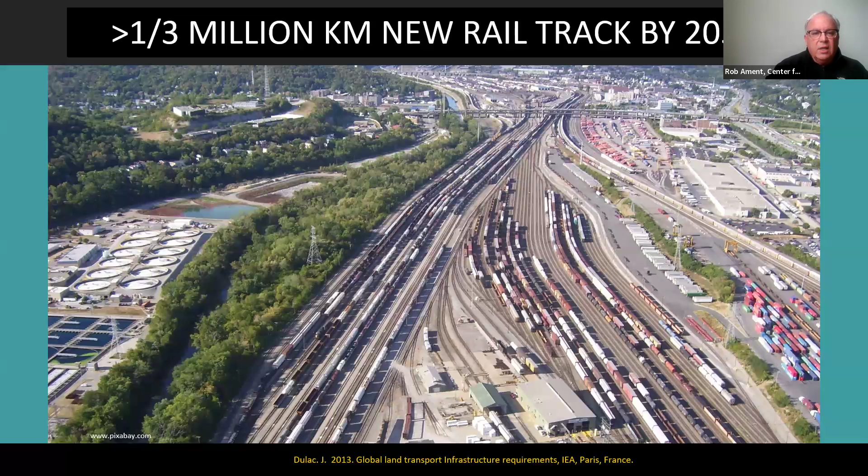And I will cover a little bit on rails as well as roads, and they too are being expanded greatly. And of course, the benefits are for economic development, and countries do want to invest in their infrastructure. So what we're trying to do is balance those needs for socioeconomic development with the protection of biodiversity and ecological connectivity. And this is where I always share with people around the world the case for wildlife crossings.

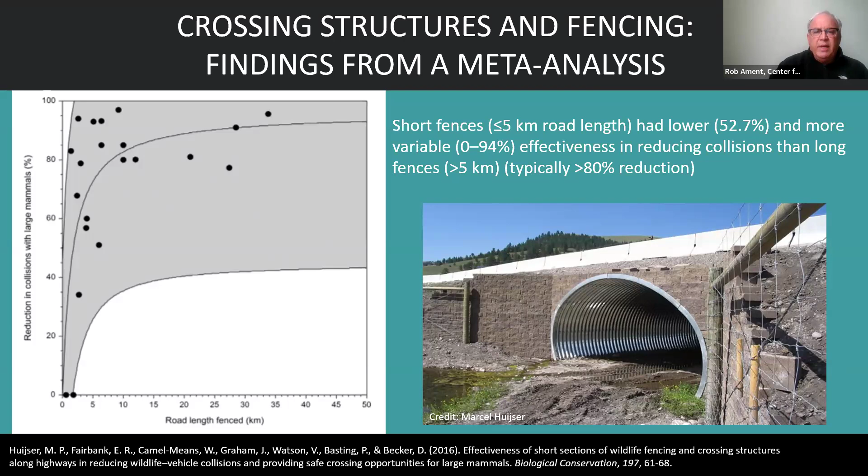And so this is now being established across the world. The very first group to focus on ecological connectivity at the IUCN was established just in 2016. And the president of my organization, the Center for Large Landscape Conservation, Gary Tabor, is the chair. And so as a result of being the chair of the IUCN's connectivity group, we provide its secretariat. Basically, we staff it for 1,200 members, all volunteers on all the continents.

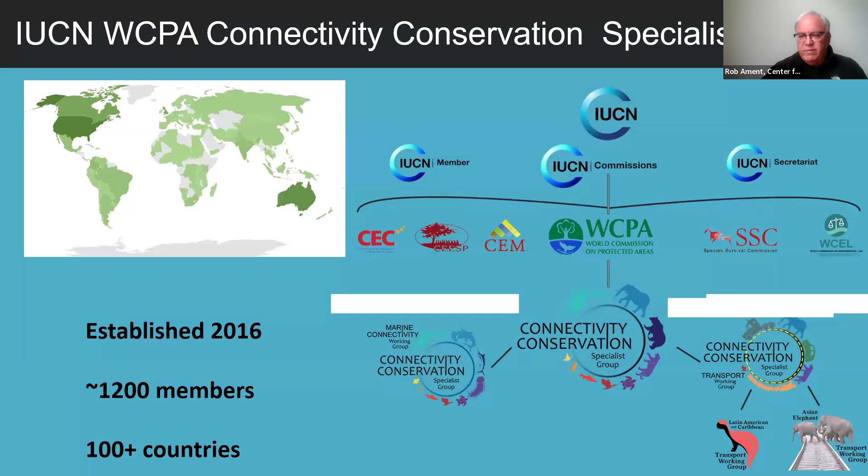And there are many different specialist groups, but you can see we sort of sit under the World Commission on Protected Areas. So we don't have a broad term of reference, but our working group for transportation is focused on ecological connectivity and to help managers of protected and conserved areas address linear infrastructure.

So then just 1 year later, the CCSG, the Connectivity Conservation Specialist Group, formed the Transport Working Group. They said one of the biggest barriers to connectivity is transportation. We need some expertise on that. And so that was formed. I'm a co-chair along with Rod van der Ree out of Australia. We have 100 members, and we were to provide advice on policy science. You can see the terms of reference to the CCSG.

And so the Transport Working Group published our first, it took us 4 years. We had over 40 contributors to this publication. And of course, IUCN published it, and it just came out last July. And we did our first webinar 2 days ago. So this is very timely, and we're starting to promote the results of the technical report. And we're quite pleased with the response we're getting across the world.

And so we know that providing advice just globally often is not very context sensitive. So we are experimenting with 2 subgroups in our Transport Working Group. One is species specific, and that's the Asian Elephant Transport Working Group. And one is sort of sub-regional, the Latin America, Caribbean Transport Working Group. They conduct their meetings primarily in Spanish and Portuguese. So we have these 2 groups, and they're continuing the work of the larger group.

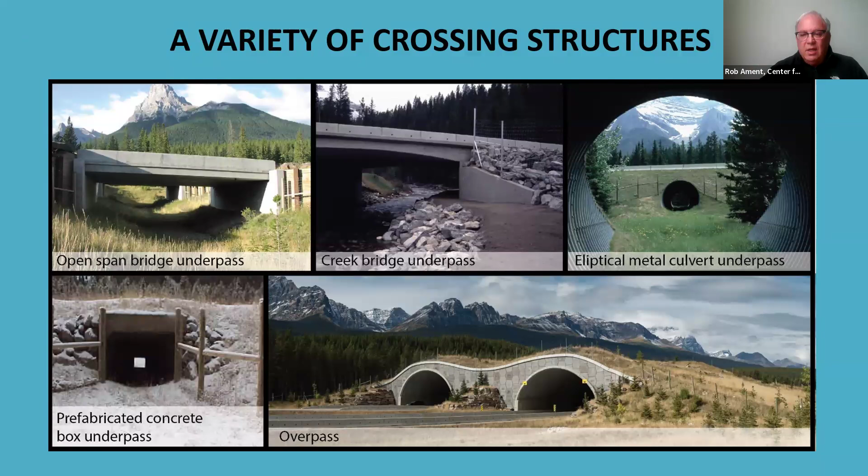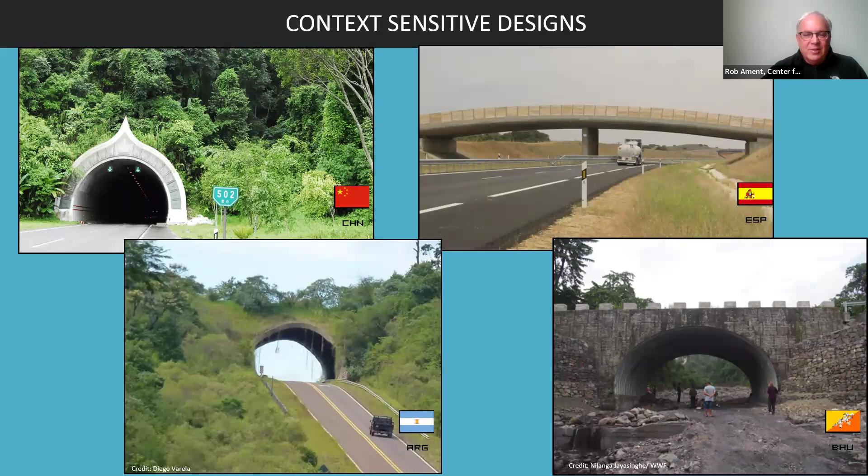And 2 years later, I was invited to Guadalajara. 300 civil engineers get together and are finally starting to talk about this. They're getting really excited about starting to design their highway systems so they're more sustainable and providing ecological connectivity.

I met a fellow who was a consultant at this conference. There was no field trip. And then he takes me out on the road outside Guadalajara. And he says, yeah, I'm the consultant studying the wildlife crossings. I said, oh, we didn't even have a field trip planned for this conference. And so he said, well, I'll take you.

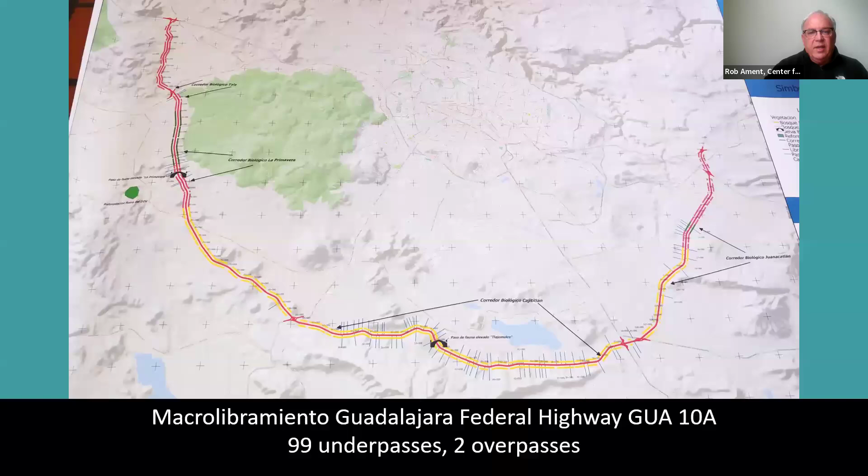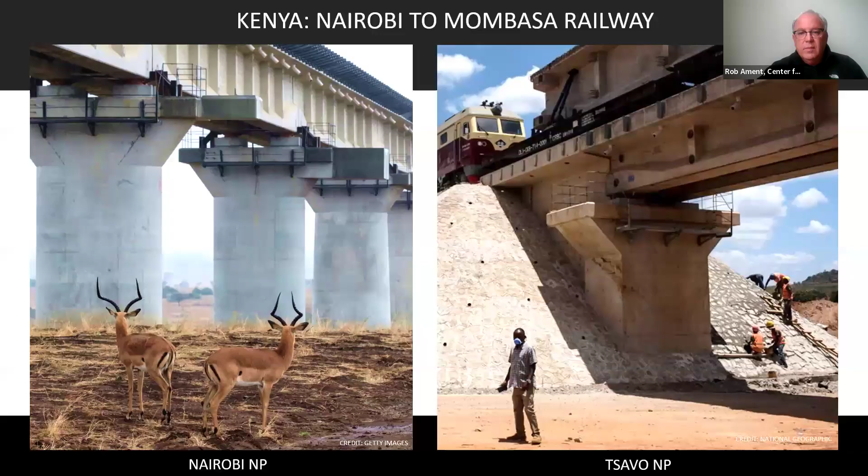So this railroad went through two different protected areas, not only Nairobi, where they lifted it on the left, but National Park, but also Tsavo.

But in Tsavo, they just created underpasses and put in monitoring, and they actually published a paper on this. What they found is even these are quite high - 30% of the elephants won't use the structures because they're narrower than the totally elevated rail. So even though they built about 6 structures like this, they've seen very little use by a major chunk of the local population. So even when mitigation is put in, sometimes it doesn't work as effectively as possible.

We're now recommending - the Asian Elephant Transport Working Group is recommending - 6 meters as a minimum for underpass structures. But at least they were able to mitigate the rail through the protected area.

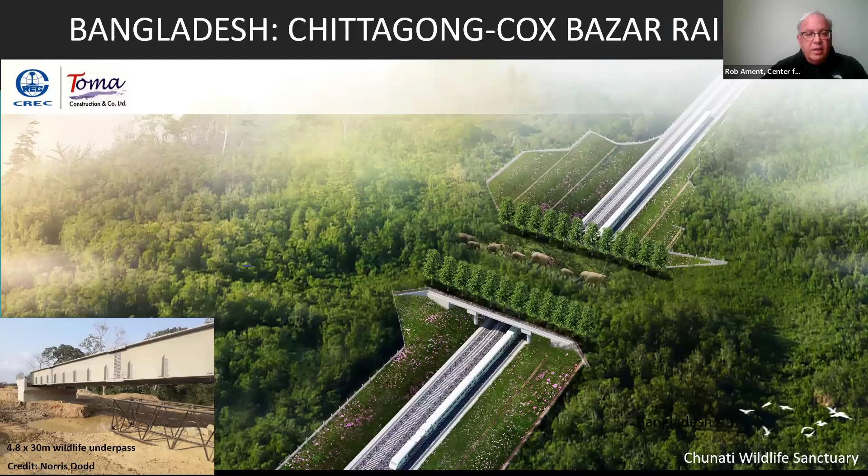And this is the first Asian elephant overpass in the world, and it's Bangladesh building it. So again, these are not wealthy countries. They're taking out loans to build this infrastructure, but they're still trying to protect their biodiversity and their ecological connectivity.

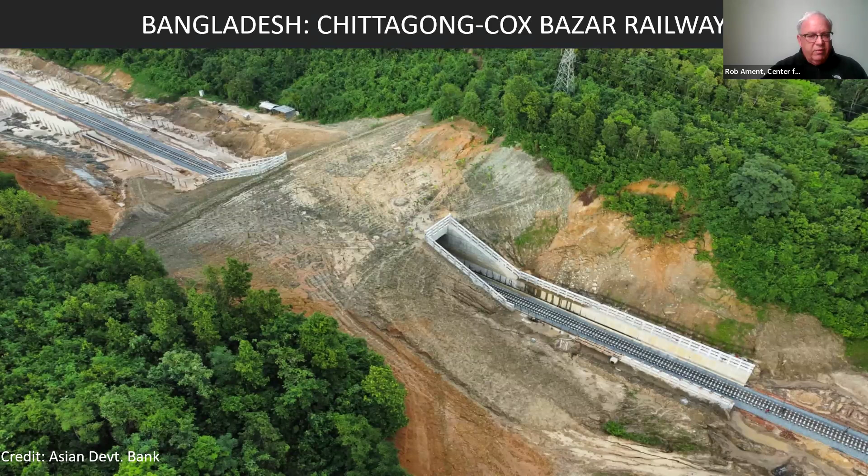And there had been a very well-conducted pre-construction analysis of wildlife before the rail was built, and they knew where the elephant corridors were. So these are well-placed structures as well.

So to get to zero mortality, what they did is slow all trains down. I don't know of any railroad where we're managing speeds to protect wildlife in North America, but they make it go down to 20 kilometers per hour through this area that they know the elephants frequent. Just by traffic calming, as they call the mitigation measure, they've stopped all the mortality. So a simple thing rather than a structure - they went with management of train speed.

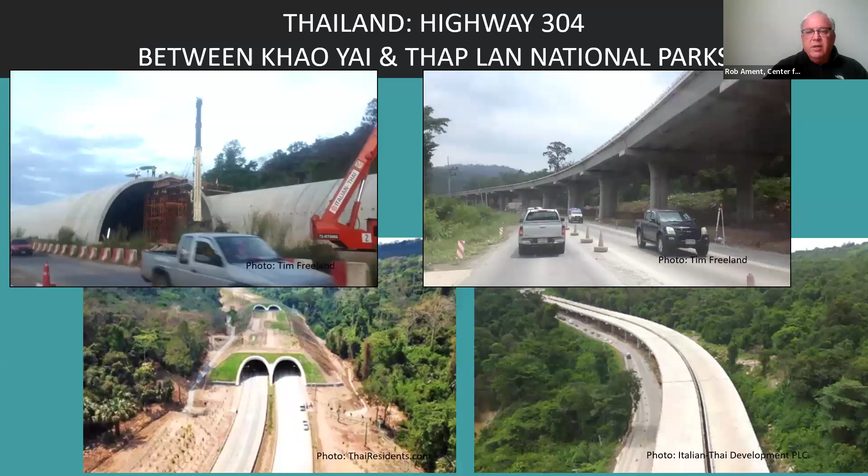Thailand is also building their very first structures now - 3 kilometers long for one underpass and one overpass, where they're taking a 2-lane highway and turning it into a 4-lane highway. Sounds familiar to us here in North America. It went between 2 protected areas, 2 national parks, and it's built now. I was able to go and visit this site as well. They've had everything but tigers use it - the elephants are using it, but tigers are within 1 kilometer of using the crossings now.

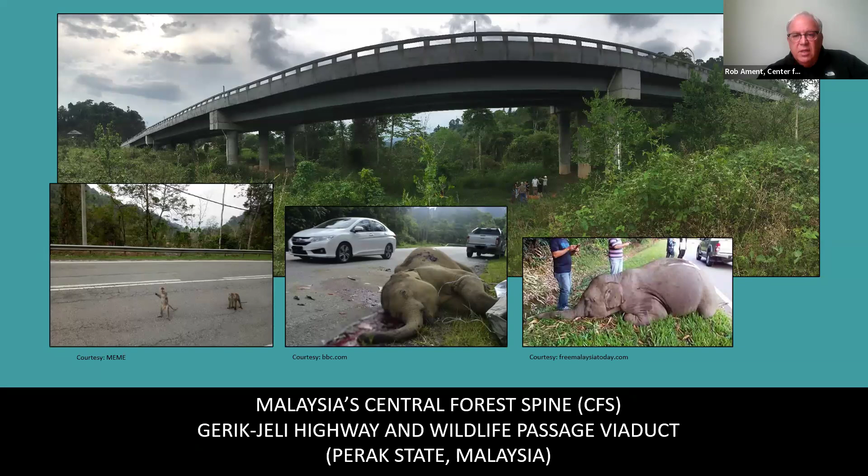The same with Malaysia - this is peninsular Malaysia. Again, their structures are so large, it's just amazing - this is 400 meters long. Basically, they call it a viaduct. We would call it an underpass, but they lift the highway up for a long stretch of highway. Again, they've recorded elephants' use of this area, but they don't have tiger use yet.

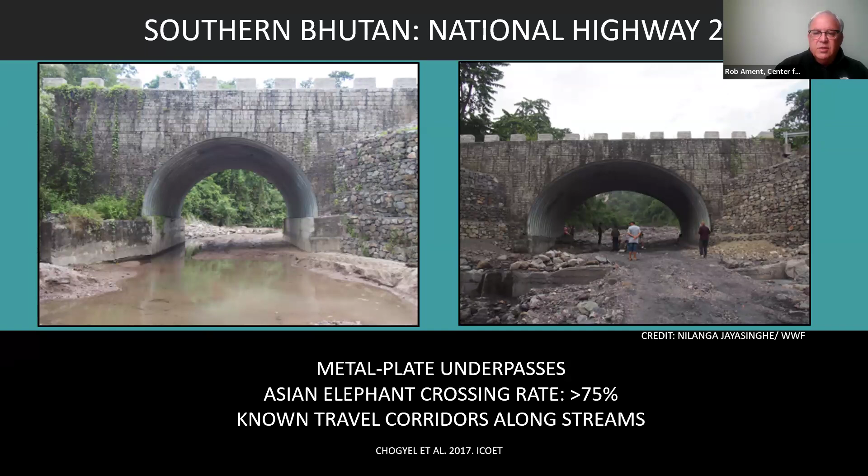And then again, Bhutan, I showed you this picture earlier. These are their very first crossings too. This happens to be a wildlife sanctuary that had elephants in it, and they were just going to do a normal stream crossing kind of culvert. But they decided to build it 8 meters tall with arch steel. They've had incredible passage rates of over 75% now. So these structures are working, and this has encouraged them. They're now building a whole series of other wildlife crossings in their country. It's amazing how once they build a few and see how effective they are, they're starting to become standard practice in some of these countries.

So I asked them about that. I said, it seems to be counterproductive to why you build an overpass. And they said, there's feral pigs on one side of this road, and we don't want them to get into the wildlife sanctuary on the other side. Both the civets and the pangolins can get up and over the fence. So anyhow, I thought that was sort of interesting. But again, quite a large structure for such medium-sized animals.

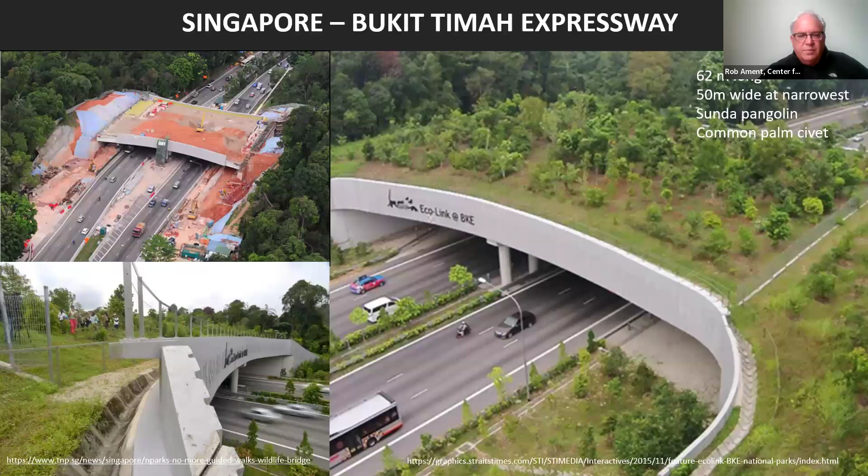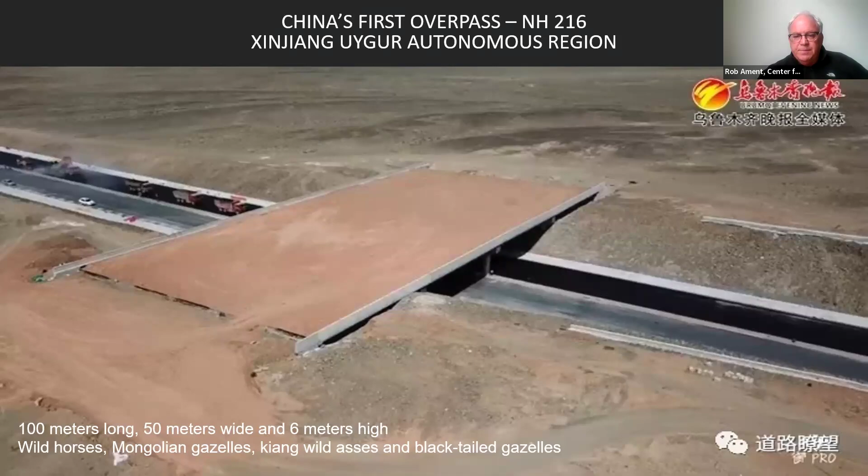And again, in China, when they build these overpasses, they're really building quite large, long structures. In the US, we always argue over 40 meters versus 50 meters versus maybe, if we're lucky, a 60-meter wide overpass for large animals. These other countries are just building huge wildlife crossing structures. It's just unbelievable.

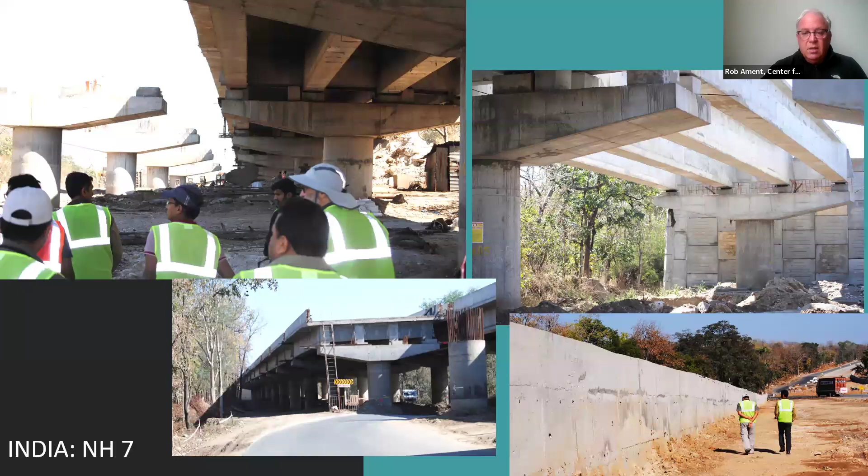I went to central India, where they have an excellent tiger population across this landscape. The Global Tiger Forum was having its first infrastructure workshop, and the field trip was out to their very first tiger crossing. They're lifting the highway up for 750 meters long for tiger passage and other species as well. But they passed a law, they amended their Wildlife Act to include tiger corridors back in 2006. So any road that goes through a tiger corridor adjacent to a tiger reserve, they invest in incredible mitigation measures to maintain that ecological connectivity for the species and for many others as well.

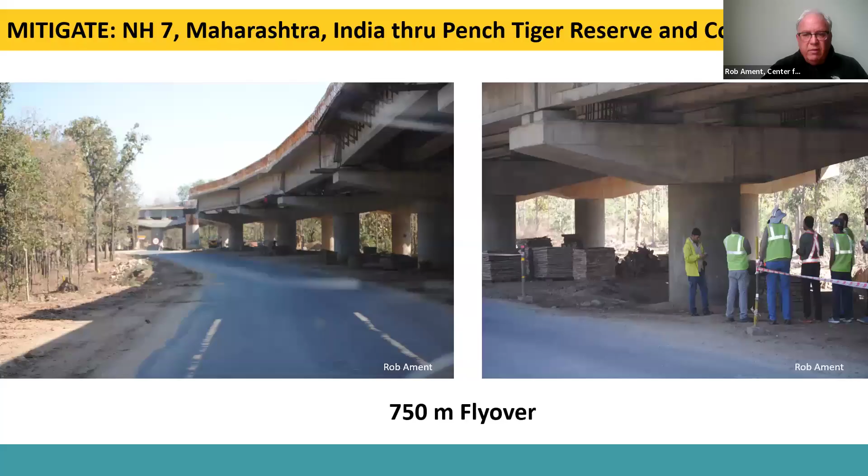So this is another look at it. They'll remove that road, the 2-lane highway, and build a 4-lane highway - this is while we were there for our field trip. A colleague sent this after they were finished, this is what it looks like. It seems so natural now, and within 1 year, our colleague at the Wildlife Institute of India in charge of monitoring, Dr. Bilal Habib, sent us these photos from his monitoring cameras. Now it's been several years, and all the species and the vegetation are coming back, and a whole variety of species in the area are using it as well.

So they're building them big. And now, this is unbelievable - India's building 12-kilometer long flyovers for wildlife. They're building an expressway. Again, Delhi is the capital, Dehradun is to the north, and this happens to be a forest reserve adjacent to Rajaji National Park. So they're just lifting the highway for 12 kilometers for wildlife movement under the new expressway.

And I talked to an engineer, and I said, if you build a four-lane highway on the ground versus this 4-lane highway in the air, what's the difference in cost? And they said 6 times. So they're willing to invest that kind of cost to really build impressive structures that will guarantee ecological connectivity, both functional and structural connectivity.

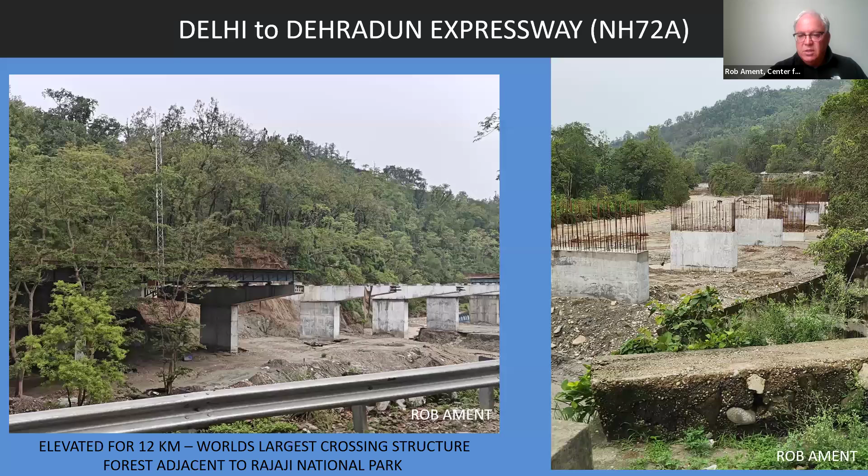And now we think 12-kilometer is long. This is another national park in Assam, India, and we met with the engineer there too. He's going to put 35 kilometers of this new highway.

On the left, I should first explain, Roads is a smartphone app to collect roadkill and live crossings. We gave that to and set up a local NGO to collect data for a year, then did a spatial analysis of the hotspots.

We thought, and then we met with the state engineer who was the project manager. As you can see, the top one is the dead animals, statistically higher than other parts of the road. If you focus only on roadkill, you'd build your structures in panel A, but looking at live crossings gives different locations, remember it's going from a 2-lane to a 4-lane highway. We didn't know they were going to elevate it when we were collecting the data.

So we really think data collection needs to be more than just roadkill databases to really think about where crossing structures should be built. We met with the engineer and presented this data to him because he didn't have any data.

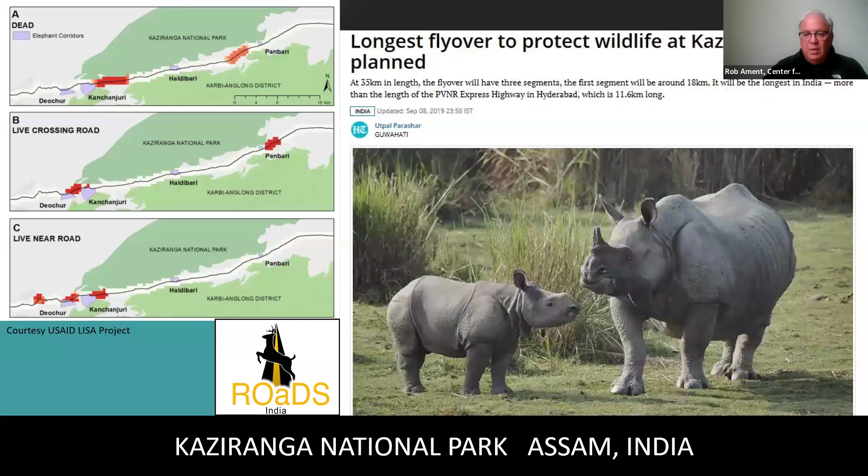So this is an engineering decision, by the way, it wasn't a Park Service, Parks India decision. Really impressive how much they want to take care of their endangered species.

Some other things we don't do very often here in North America that I thought I'd share with you. This is from the Netherlands, they're putting water on top of some of their bigger structures for the smaller animals. We often design for wide-ranging, large animals that can move across in minutes, but we don't think about amphibians that might take days to cross such a big structure. The Netherlands actually tries to incorporate water on many of its crossing structures, which I think is interesting, and again in North America I haven't seen much of that.

And of course small structures, I know we're starting to focus more than just on our iconic big species. I like the idea of putting in smaller structures that don't work during rainy seasons, since many mammals can't get through, so they put these little dry ramps lifted above the water in through the culverts. This was Roscoe Steele out of Missoula, Montana, who made these structures, placed and monitored in Montana. But I haven't seen much of that as I go around the world, retrofitting culverts for small mammals as crossing structures.

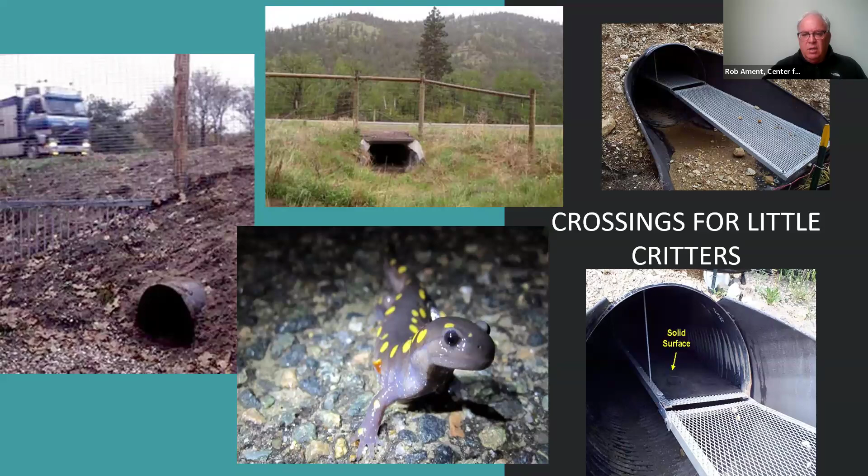And then this is from Japan, I just thought that was interesting. We don't think of our railroad, the rails themselves, as barriers for wildlife movement. So for their small reptiles that can't actually get up and over a rail, they put these very small turtle crossings in for their railroad. Again, I don't think we're that creative, we're not thinking about all the species quite often when we're designing our roads and railways.

Of course, you are in Waterton. I love taking this around the world and showing people. Barb Johnston from Parks Canada shared this with me, but the way they came up with the design, this is the entrance road to Waterton for those that aren't familiar with it.

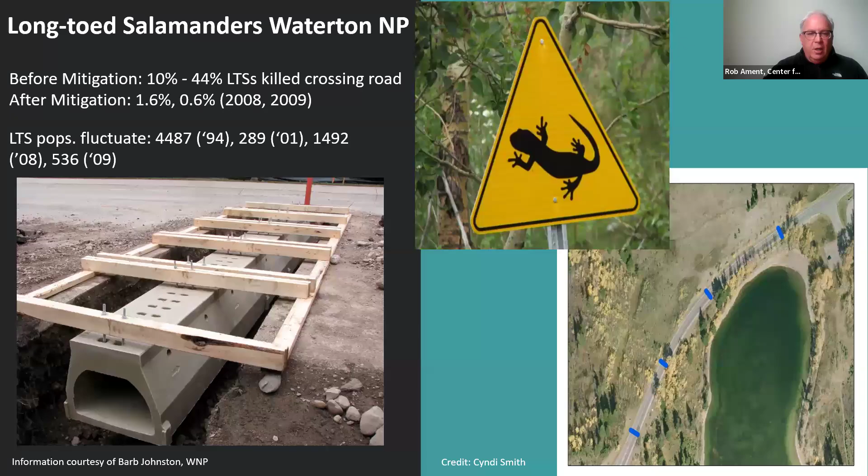So they put in these 4 or 5 crossing structures, and now it's minimal, down to 1% or less of the salamanders killed on the road. Again, these are quite inexpensive solutions to provide for more than just large species, not costly like a grizzly bear crossing, right? Another thing I don't think we're thinking about as much as the rest of the world is arboreal crossings.

And this was, again, when I was at the Western Transportation Institute, we supported a grad student, and he was looking at northern flying squirrels, because in Washington, on the west slopes, they're the primary prey base for the owl. So they wanted to see about the openings created by Interstate 90. And so he actually radio collared 17 of these adults, and then found that the furthest that they actually fly or glide over 2 years was 80 meters.

And so I don't know if we're thinking about the gaps we're creating. I haven't seen many arboreal crossings in our part of the world. I know they do for the northern flying squirrel. North Carolina has built crossing structures for them, but here in the West, I just don't see much attention being paid to what species are in the forest and which ones may need support for crossing these big forest gaps that are continuous for long areas.

And he did do a genetic study as well and found there was still mixing. What he did find is the most popular place where they crossed I-90, there was a median with a little vestige of forest left. And so they could actually go to the middle of the highway and then cross 2 lanes at a time. And having that narrower gap facilitated crossing. So I don't think we're designing for them.

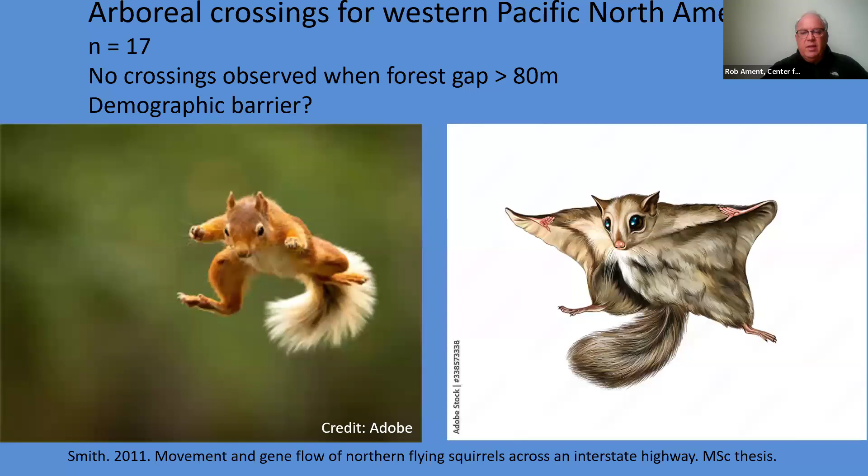And I just wanted to bring that to everyone's attention, because when you go around the world, they're building structures, and again, these are inexpensive investments. Often they're just like a telephone pole with some things connecting. I'll show you how inexpensive it is.

So a local conservation group actually started climbing the trees and twisting the foliage together. And after a decade, the trees grew together. Because again, they have monitoring, they tried to build a structure, and it didn't work. The Hoolocks wouldn't use it. But when they rewove the forest canopy back together, now Hoolock cousins have finally met each other, basically after 100 years. So it's a very inexpensive solution, but it is thinking about what's living in our canopies and what their needs are. And again, just some staff time is all it took to reconnect these populations.

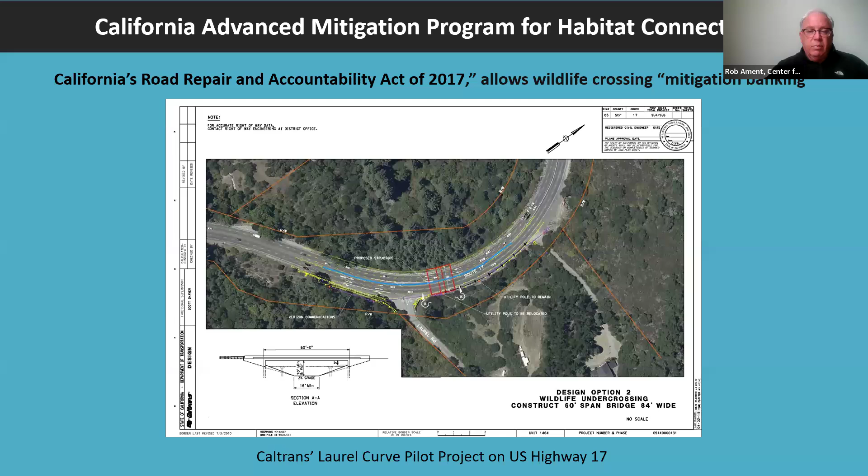And California did it and passed this law, and they actually built this crossing and banked it. So there's no highway project here, but it was an important place. They knew they needed a wildlife crossing sooner than later. So they built it here, and they're now banking those credits for another highway project in the future. So I thought that was an interesting thing that might be possible and replicable in other locations.

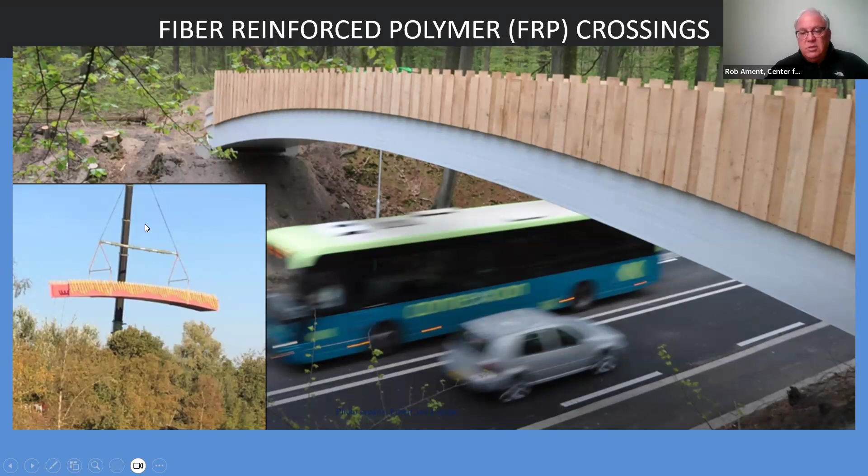So we always think about climate change and how species might be moving and adapting to changing environments. But we don't think about our structures as being adaptable in response to animal population movement. And when you think about it, with just regular construction equipment, you can move these in and out of the sites quite easily, compared to a concrete structure, which would be impossible. So we wanted to look at this. This is another close-up I took of the actual crossing. So again, that's FRP, that's not concrete.

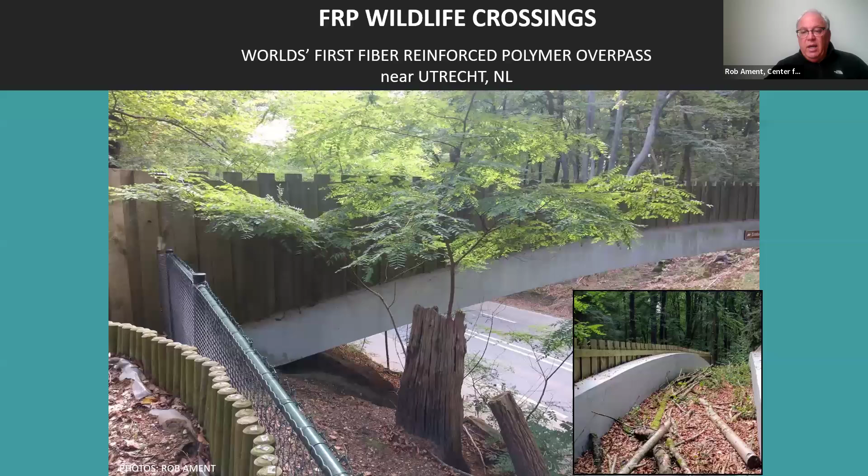And so we got pretty excited about this, and we came back home, and we actually have a project in California, and the US doesn't have the same manufacturer that made the ones in the Netherlands. We worked with one that makes FRP tub girders, they're called. And so we worked with California, Caltrans, to design the very first one based on FRP tub girders. So you can see on this image on the bottom right, those are the tub girders that are the structural things. Then across it is a deck of FRP.

And so you would be able to swing an FRP deck piece in and build this in a matter of a day or two. And then they would finish it by putting a 4-inch layer of concrete, and then the soil on top of that. And the fencing and the sound barriers are all FRP as well. So it would have been the first FRP, and we had the design finished, and they costed it out because it was so innovative. It cost twice as much as standard concrete, and they didn't have the budget for it.

So it's possible here. We have FRP manufacturers. We looked into it. Canada has FRP manufacturers as well. And we should really be thinking about this modularity notion. It is possible now. In other words, the materials exist. That was a 3-lane highway in California. Maybe we should have started smaller and shorter. It had never been built that long before, so they didn't have any tests to base decisions on, so it was too high of a risk for the engineers. But if we had gone smaller, they have proof of that.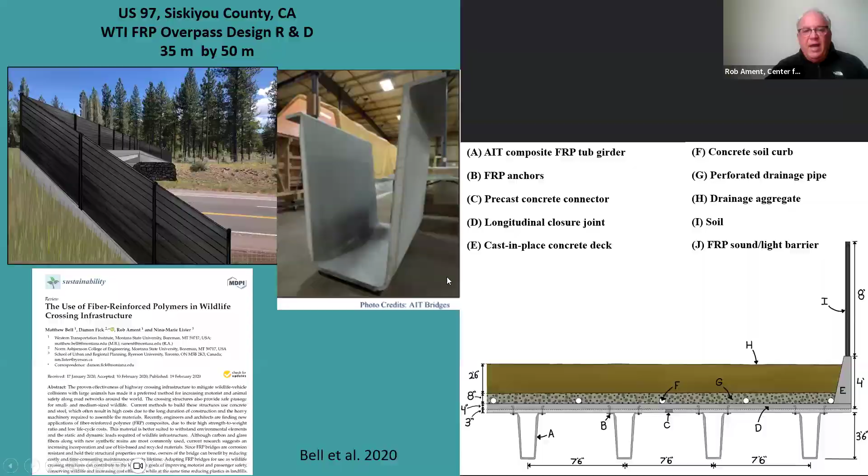And this FRP, they're starting to work on using natural products like flax and things like that for the fibers. So it'll be more natural in the long haul. So anyhow, we need to think about new materials. That's some ideas. Maybe Canada can beat the US to the punch and build the first FRP crossing. But the materials are out there for anyone that's inspired to move forward with it.

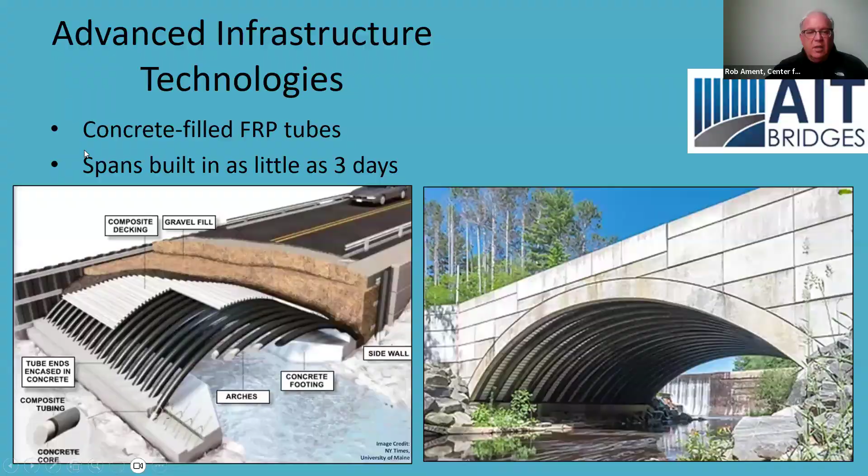So that's my talk, and I just wanted to sort of show you what Canada has inspired, and I hope now you're seeing what the world is doing, and it might inspire you to think about some new techniques or new ways to build crossings for species in Canada. Thank you.